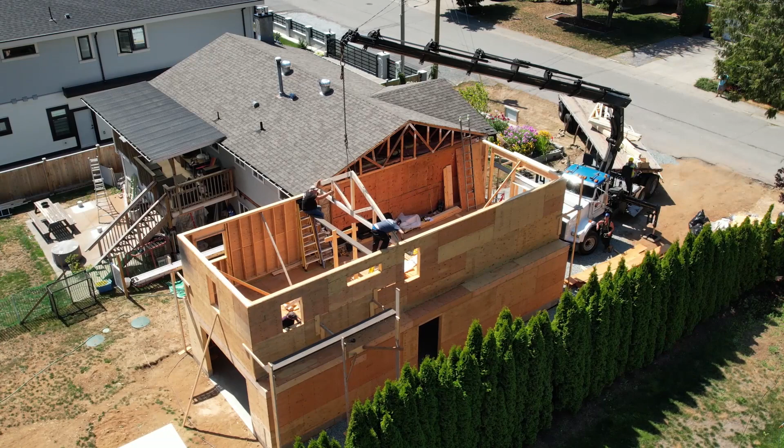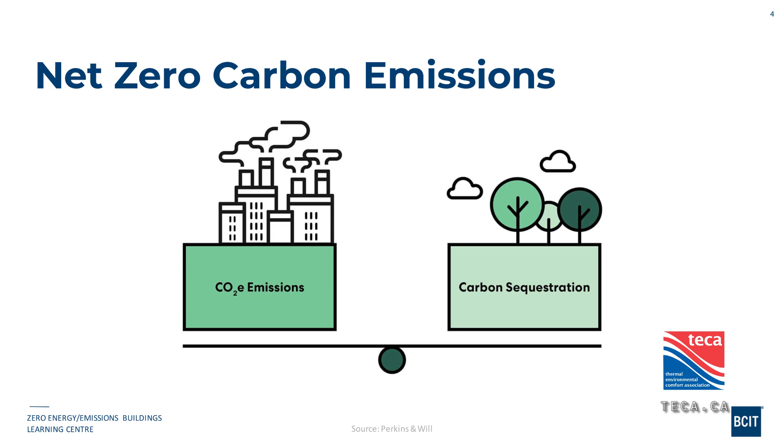Net zero, and what does it mean? You hear this term all the time, you hear politicians talking about it. We're really talking about emissions, and we're talking about balancing the net emissions that we put out into the atmosphere from manufacturing, energy production, land use patterns, all that kind of stuff, with how much carbon we're sequestering at the same time, right? We're trying to get climate change under control, so with net zero we're talking about carbon emissions.

All of this is driven by the Intergovernmental Panel on Climate Change. They've known for like 25 years that to get climate change under control, we have to keep global temperatures within that 1.5 degree overall increase. This is the number, and this is the science that's driving all of our regulations and policies. We need to get about 50% of the way to net zero emissions by 2030 and net zero by 2050. This is what our federal government regulations and policies are striving towards, and this is what BC is chasing as well.

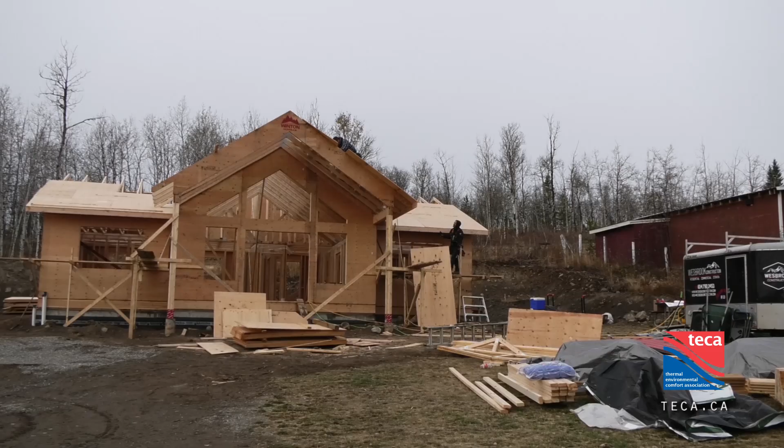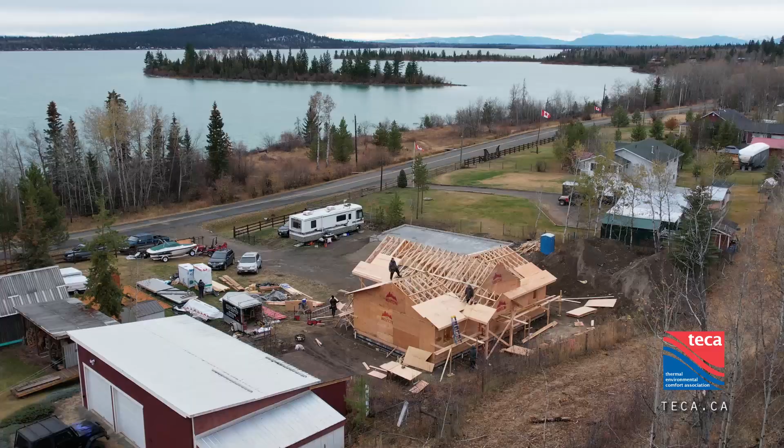Operational carbon is emissions related to energy, so that's your energy use and the emissions associated with that. And then to get to net zero, we're trying to avoid emissions too, so we'll start to see more about renewable energy generation and maybe buying carbon offsets or things off-site. So that's kind of our package for buildings to get to net zero.

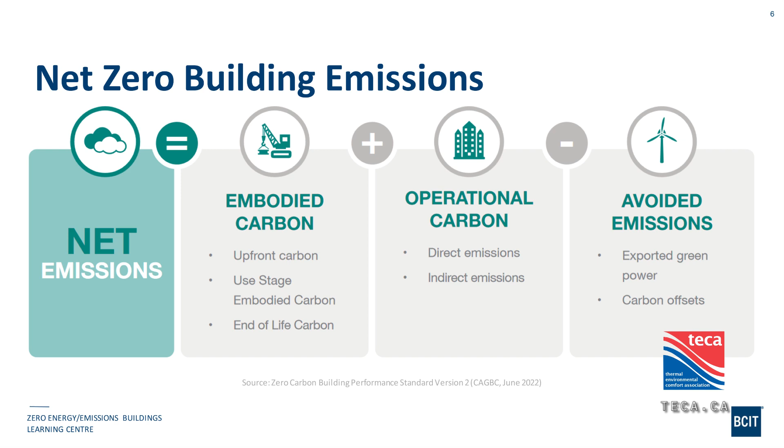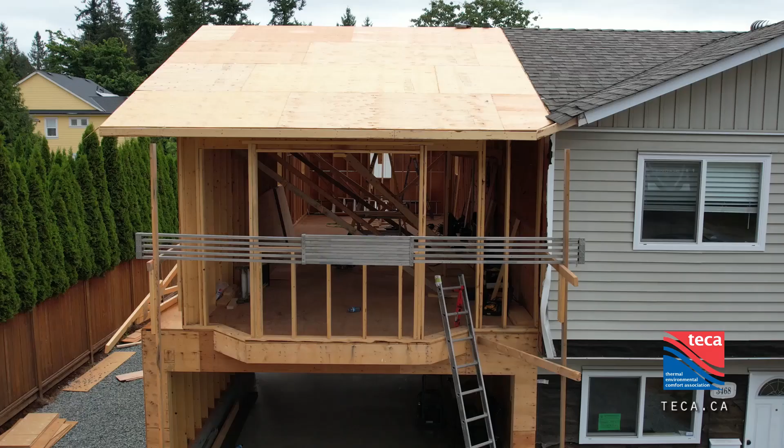So here's a quick poll for you guys. What do you think contributes more emissions in BC every year? Is it the emissions from all the new buildings we're building every year, new construction as well as retrofits of existing buildings? Or is it emissions from energy use of our entire building portfolio? They're almost identical. Embodied carbon from new construction and building renovations every year in British Columbia is 7.2 megatons. Operational carbon from energy in the province is 8.3 megatons. The step code and the zero carbon step code are really only focusing here right now.

Key things to remember: embodied carbon is the emissions from the materials in the building, and operational carbon is emissions from energy use. Achieving zero carbon requires us to tackle both of those, and whatever we can't reduce, we need to buy offsets, right? So let's quickly look at the regulatory context and what's happening.

The feds have standards. The federal government has a 2030 emission reduction plan for Canada, where it assigns responsibilities across the provinces, and it also assigns responsibility to buildings that you guys are responsible for. Clean BC has a roadmap to 2030. Both of these plans have acts underpinning them, so they are regulation. We have to hit these targets and report and measure on this every year. That's why the regulators and the utilities are pushing back on you guys to deliver savings.

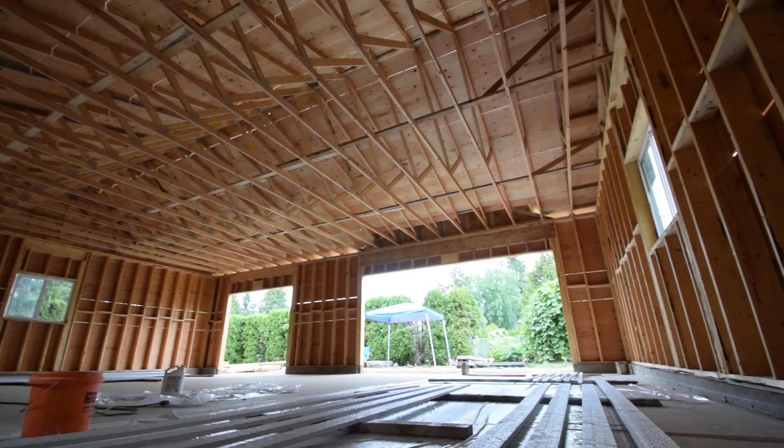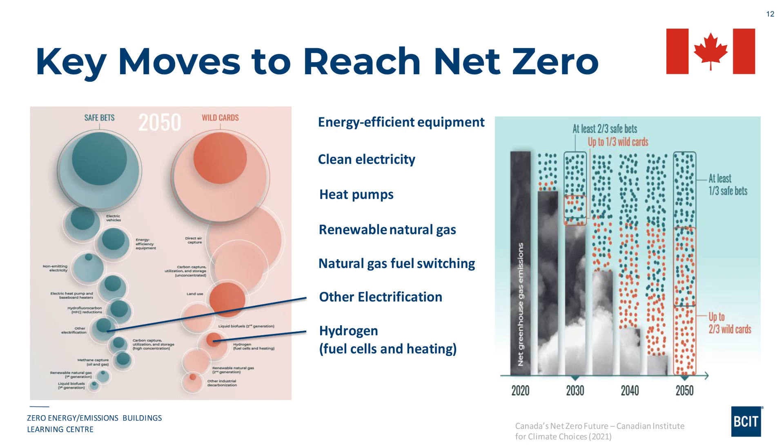Carbon capture and storage. These are technologies that we're developing, and they're not there yet. And so if you think about the pathway to 2050, they're going to do all the stuff that we know right away, and that's where buildings fall in. And that's why the pathway to decarbonize buildings is faster than 2050, and that's why it's more aggressive.

Clean BC has a section for better buildings. The 2030 Clean BC plan is targeting 59 to 64% emission reductions from buildings and communities. So there's some land use in there in that target. Five big areas where they're focusing on seeing those reductions, and that's what's driving the policies, the incentive programs, the step code, the zero carbon step code that you're already seeing.

So they're tackling energy efficiency, low carbon energy sources. Down here at the bottom, they say low embodied carbon materials, but we don't have any regulations around this yet. Does everybody know what the step code is?

Yes, you're a winner. Step code for Part 9 buildings, which is what I was going to focus on today, is in 9.36 of the building code. May 2023, this became mandatory for all municipalities everywhere in the province. Step 3 was required. And Step 3 is about a 20% efficiency improvement over the previous code.

In May, we also adopted the zero carbon step code. And I'm going to talk to you about this because zero carbon sounds a lot like no natural gas, and that's not actually what it means. But we'll talk about this a little bit later. But the zero carbon step code is an optional pathway. Municipalities choose what they want you to achieve, right, based on their greenhouse gas reduction targets.

2032 is the end of, remember how I said, on our pathway to 2050, the sure bets, buildings have a lot of sure bets in terms of decarbonizing. So we're trying to decarbonize buildings faster. So 2032, we're at the top step of the step code for Part 9, roughly 80% more efficient buildings.

By 2030, Clean BC says we're going to have more efficient equipment. Every new piece of space or water heating equipment will be at least 100% efficient. So that's a big change for us. And we're waiting to see that roll out, but that's going to mean we're going to have problems with fossil fuel combustion equipment.

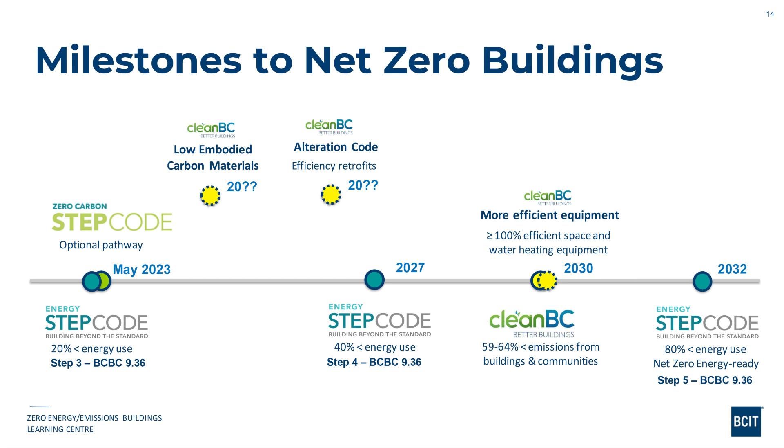So before I wrap up the conversation about regulations, I think it's really important to be clear about what the BC Building Code means when it says net zero energy ready. So a net zero building is a building that produces as much clean energy on site as it consumes in a year. It doesn't mean you're disconnected from the grid, but it means that you have solar panels on the roof and your EnerGuide label says you're down here at zero.

You're certainly consuming energy. If you're familiar with these labels, it tells you this much for heating, this much for ventilation, this much for lighting. But you're producing it net over the year with that solar array to bring it down to zero. CHBA manages a net zero labeling program, so you may be used to seeing their net zero home label.

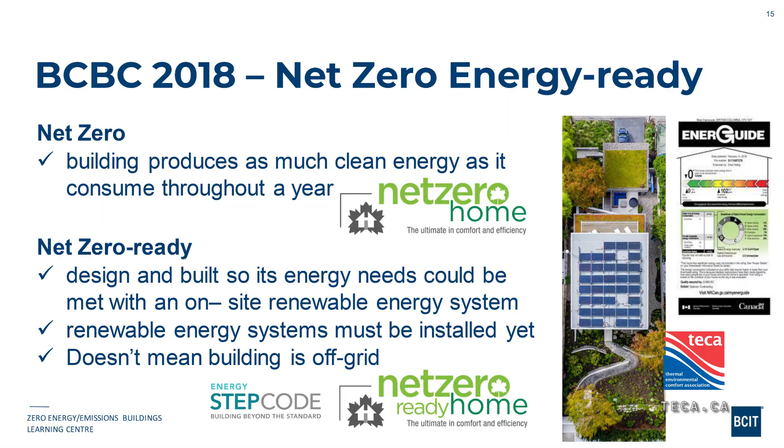The BC Energy Step Code, with their 80% more efficient buildings at the top step, is striving to build a net zero energy ready building. So the buildings we're building by 2032 or probably sooner are going to be so efficient that they can generate enough power on site to meet their energy needs net over the year.

So quick recap, Clean BC, they're asking us by 2030, 59 to 64% efficiency or emission reductions from operational and embodied carbon. But if we're not measuring embodied carbon, they're expecting you to deliver that from operational emissions.

Operational carbon is the only thing in the BC building code, right? There's nothing about embodied carbon in the building code. And operational carbon is called the zero carbon step code. It's 9.37. And embodied carbon is not regulated yet. Okay, so what does this mean for envelopes?

So how are we getting to that net zero energy ready envelope? On average, for a home, a residential building, 60% of the energy use of that building goes for heating and cooling. That includes domestic hot water use. And so in BC, a lot of our emissions are linked to that heating energy because we do a lot of heating with natural gas.

What we're moving away from in the BC Energy Step Code is buildings or homes that look like this: they've got a thin line, not very well insulated envelope. There's holes around for air leakage. And we've got a large mechanical system.

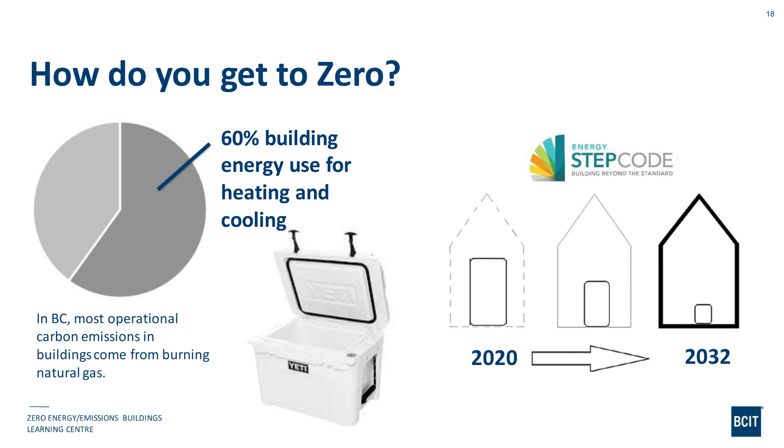As we move across on our pathway to 2032, we're tightening up that envelope, which shrinks the mechanicals, and then we're adding a lot of insulation and efficient enclosure details to really further shrink that mechanical system. So much smaller systems, and those buildings have different problems or different opportunities as well.

So the design teams working on these projects are working with 6 principles in mind. 4 of those principles have to do with the building enclosure, and the last 2 over here about ventilation and mechanicals are around the scope of work you do. So hopefully the design teams are working with you to come up with the best combination of options to hit the requirements of the Step Code.

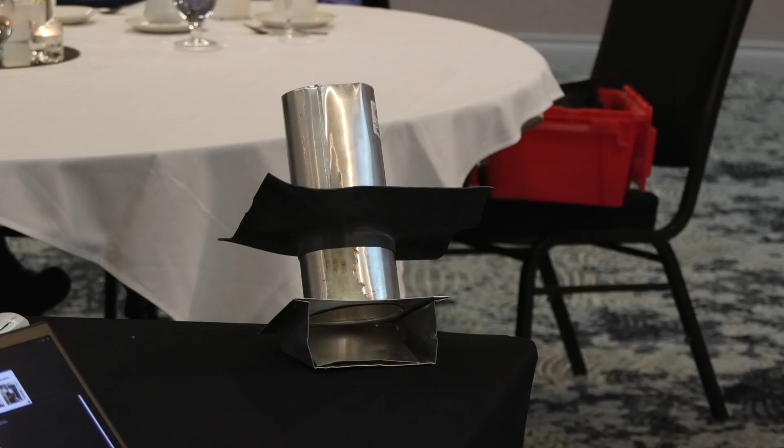So the Step Code is now a performance-based code, and every building is energy modeled. For Part 9 buildings, that's generally HOT2000 software. You have an energy advisor typically who builds that model. They program in how much windows you have, similar to your load calcs for TECA, but then we simulate that over the normalized weather file and figure out exactly how much energy that building should use.

This is the same thing that we've done for years to generate those EnerGuide labels, but we're doing them to prove Step Code compliance, and we're doing those for a building permit stage. So at the time when we get a building permit, we know all the details of the building. We know the mechanicals that are going in, we know the window spec, everything is pre-approved, and any changes to that have to get modeled and updated and get an updated confirmation that your building will comply.

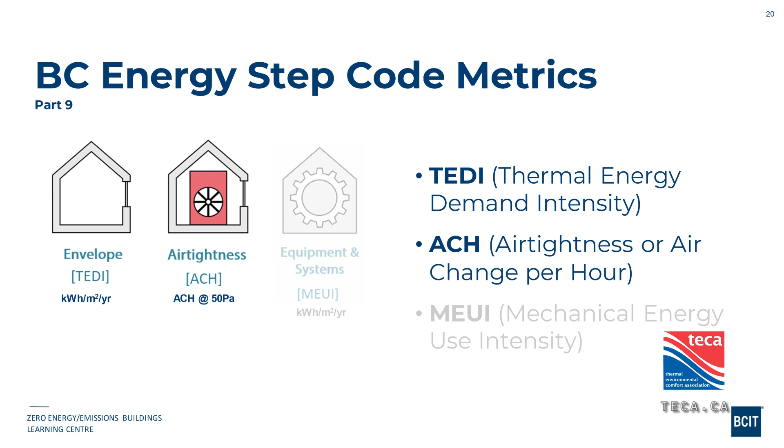So under the Step Code for Part 9, there are 3 metrics you have to comply with. It used to just be, you put in efficient equipment that was this efficient and you built an air barrier and you were good to go. With a performance-based code, that computer model is going to spit out information based on what you input in the design on the envelope, air tightness, and mechanical systems. So there's 2 metrics, TEDI and ACH, and those are the ones that are linked to the building envelope. And the last one we'll talk about a little bit later is linked to the mechanical systems that need to support that building envelope and the occupants.

When the Step Code talks about TEDI, it's in kilowatt hours per meter square per year. So there is a limit of energy that building envelope can use in a year. It's not a BTUH number, it's a BTU consumed net over the year type number. So nobody cares how big your equipment is under the Step Code. They just care how much it uses over the year to heat that building or to deliver the energy needed to that building. So that's what TEDI is.

Air changes per hour is a measurement of air tightness, and air changes is really interesting because it's the first time we actually go out and evaluate performance of your system. In a past life, I went out and evaluated the performance of mechanical electrical systems in green buildings, and they never performed the way we expected. And so we're not trying to go and measure how much energy your building is using, but with air tightness, we measure that. And so that's the piece that if anything falls down or falls apart during construction, you don't hit that air tightness performance measure.

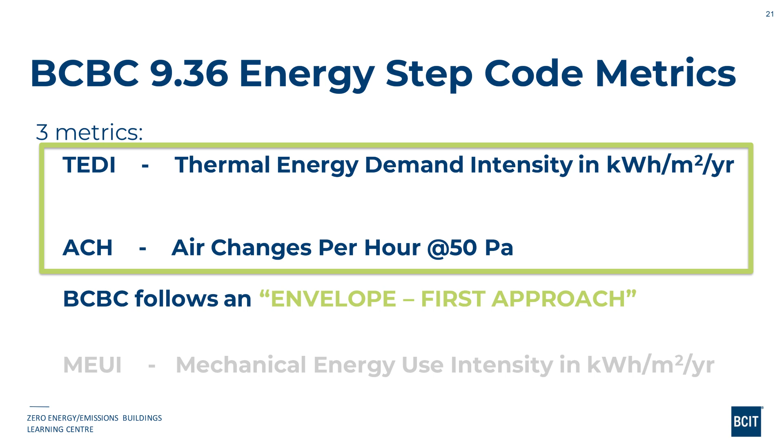So a reminder, 2 of the 3 metrics focus on the building envelope, and they lead us to do that envelope first approach. If you remember that icon where we are plugging up the holes in the building, making the walls thicker before we deal with mechanical electricals, that's called an envelope first approach. That's required with Step Code.

So what does that net zero energy ready envelope look like? So it's a high performance envelope. We know we need to reduce energy by 80% in these buildings, so we've got to tackle the envelope first. 4 big areas. Remember, we talked about 4 of the 6 principles were linked to the envelope. The first one is the improved air barrier. So you can see this red line around the house. That's that continuous air barrier detail. We'll see more insulation. We'll see reduced thermal bridging.

I'll talk a little bit about that. Better windows and doors, right? So not anything that's surprising. But air tightness is an important one to spend a bit of time talking about.

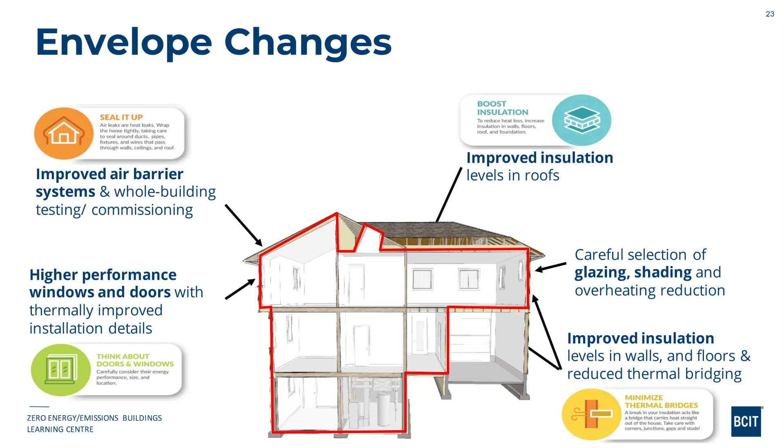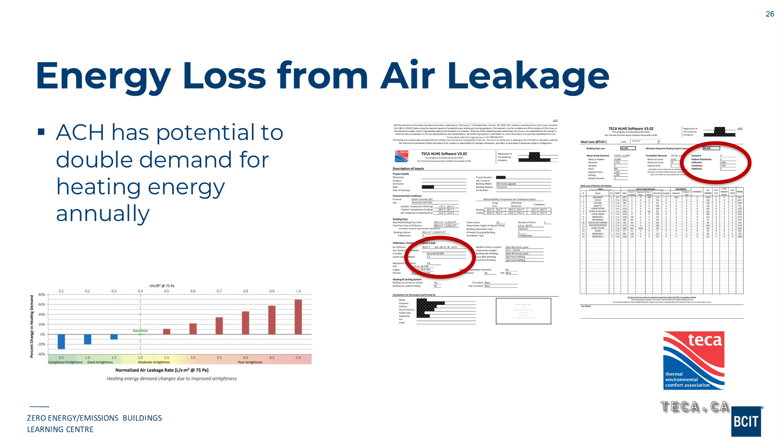So it's for sure in there, and you can play around next time you're doing a heat loss, heat gain calc, change some of those air tightness numbers and see what kind of an impact it makes on your load, because it's significant. So ACH, or air changes per hour, has the potential to double the energy used annually. It's not going to double your load calc on your TECA heat loss, heat gain, because that's your peak, that's the sizing of your equipment, but net over the year, that energy is being lost all the time, right? And so that can have a huge impact on how much energy your building consumes.

There's a lot of risks associated with air leakage in a building enclosure. This is a 4x8 sheet of drywall, no vapor barrier on it. But it's exposed to the indoor environment in your house, right? So 50% relative humidity, or that one's 40% relative humidity, 20 degrees Celsius indoor air conditions. And so over a heating season, about 1/3 of a liter of water can diffuse from the air around us, because we're breathing and cooking and showering and that kind of stuff. And it can diffuse into the wall cavity, right?

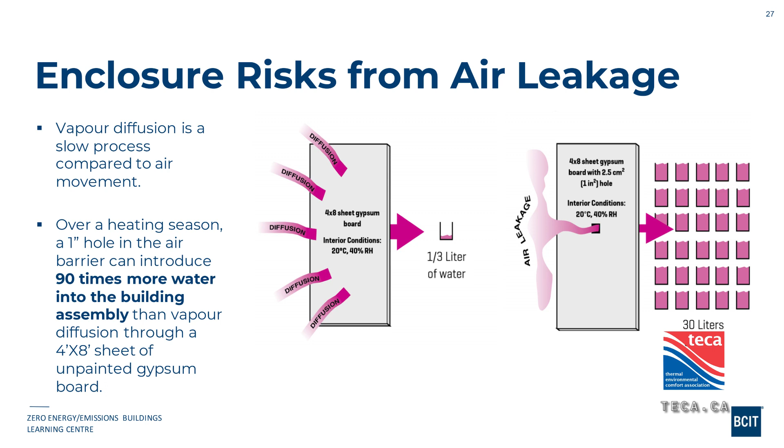It's going to move because vapor travels from areas of high concentration and warm areas to areas of low concentration and colder air. So vapor drive in a heating dominated climate is from the inside to the outside. So vapor in our house is always trying to drive out into the wall towards the outdoors. So over a heating season, 1/3 of a liter of water can move through that wall if I don't have vapor control. Air leakage in a 1-inch hole can introduce 90 times as much water. 30 liters of water can come into my wall assembly from the air around us over a heating season. So this is a huge, huge difference.

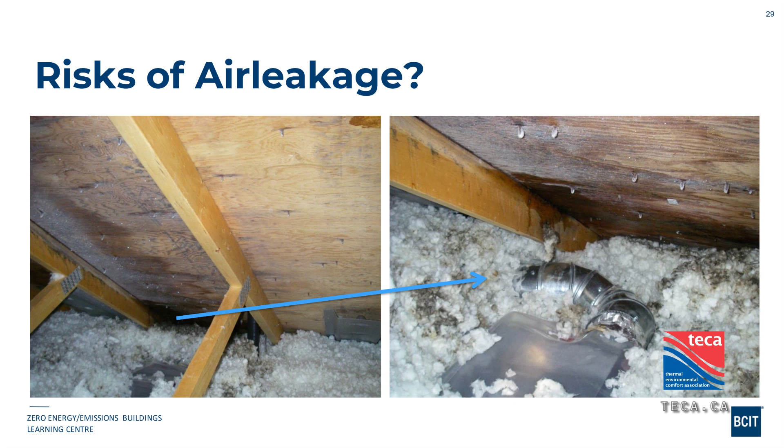So the focus on air tightness and on measuring air tightness and making sure we don't make mistakes is because there's a huge building science risk associated with air leakage. Air barrier. The poly, if you haven't done a drywall repair lately, is generally right behind the drywall. And the poly, typically in buildings, is the vapor barrier that has to be on that warm side of the building to keep all that moisture from driving into the wall. And it's often used as an air barrier.

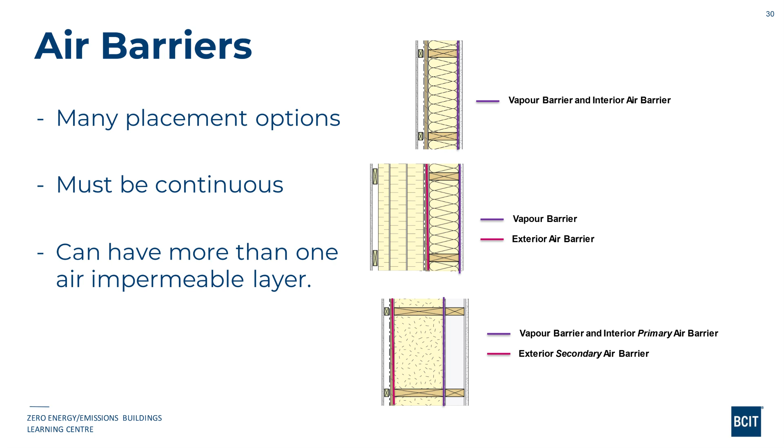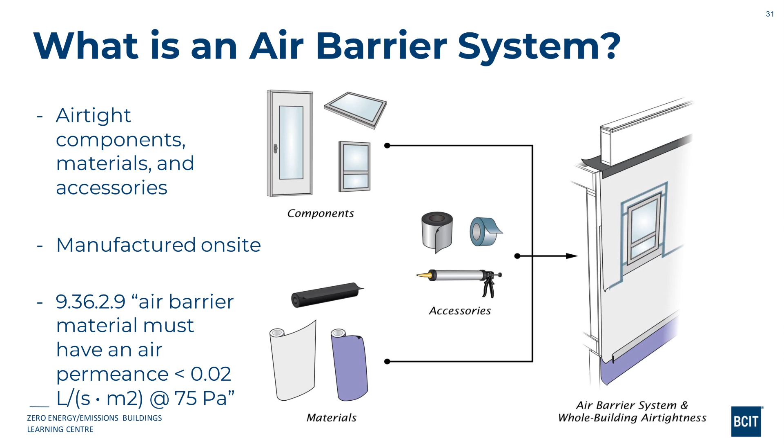But you could start seeing wall assemblies where your poly is only acting as a vapor barrier, and the outside, the building paper, the Tyvek, becomes your air barrier. Tyvek, you can see this is your framing cavity. With the STEP code, we're going to see more insulation. So once you start adding exterior insulation, then you're really protecting that air barrier. So your air barrier can be on the inside, it can be on the outside, it can be sandwiched between some layers of insulation. As long as it's continuous, it's effective. It doesn't matter where it is.

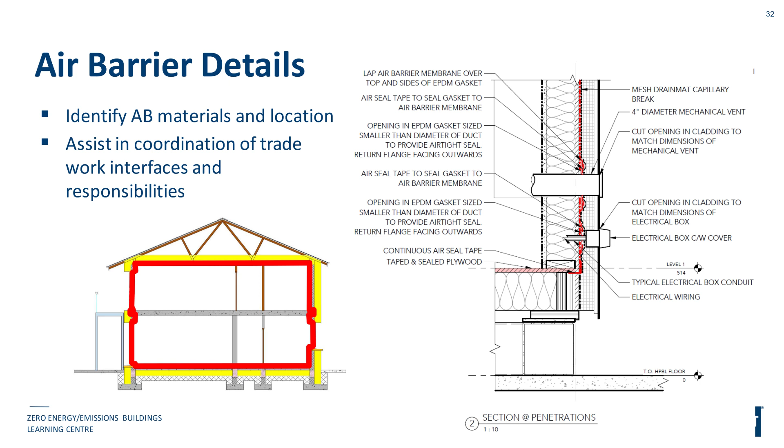In a deep, fat wall like this, we want 2 air barriers. You guys don't need to figure this out, but somebody in your project team should tell you exactly what materials are the air barriers. Is it on the inside? Is it on the outside? What is the strategy to detail that air barrier? So you have to understand what each of these layers are doing. Where's your air barrier? Where's your vapor barrier?

So the air barrier needs to be sealed and made continuous, and the vapor barrier just needs to be everywhere, but it doesn't need to be made airtight unless your vapor barrier is also your air barrier. And in a lot of our old buildings, poly behind the drywall was the air barrier and the vapor barrier.

And more people are shifting to an exterior air barrier, using your Tyvek as the air barrier, because it's easier to protect over the life of the building, right? When you want to put in a new kitchen, there isn't all this damage to your air barrier. But also, there's fewer interfaces to manage.

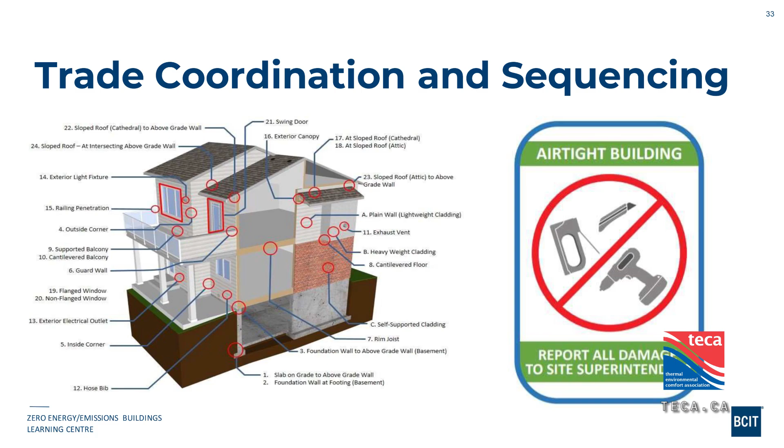Fewer trades are working in that zone. As we make the walls thicker, we're adding in higher performance windows. We're also getting a little bit more scared about building science in these homes.

And I say scared, I get scared because what happens is, as we add more insulation, the drying potential of those assemblies... like I was pushing a lot of heat through the walls, right? All those BTUs in that furnace were pushing heat through the walls to dry it. So if I was having some condensation from air leakage in my wall, it was probably okay in my 1950 home with 2x4 walls, because I was pushing a lot of heat through to help keep it dry.

But as I make those walls really thick, there's almost no heat getting through those walls anymore. So the drying potential has decreased. So we're seeing a shift to things that are less risky from a building science perspective, right? We're trying to mitigate condensation on windows.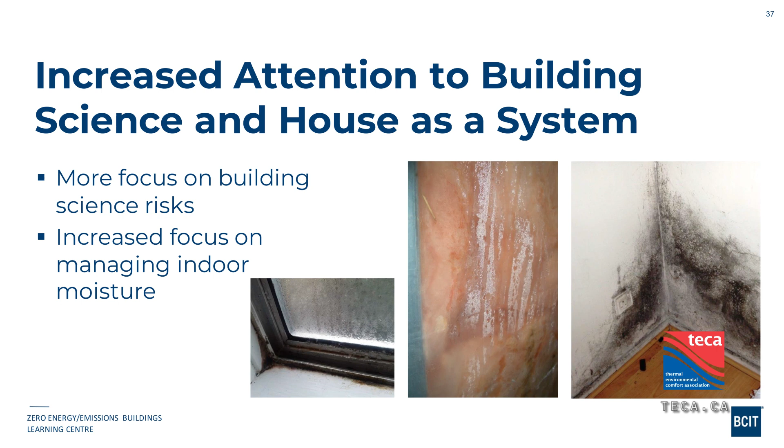So there's a lot of concerns, and that's why I'm already hearing building officials saying this is too risky. We want to see a building enclosure specialist and engineer sign off on this detail. They're worried about moisture and that kind of thing. So it's a good time to go back and look at vapor barriers when we're talking about moisture.

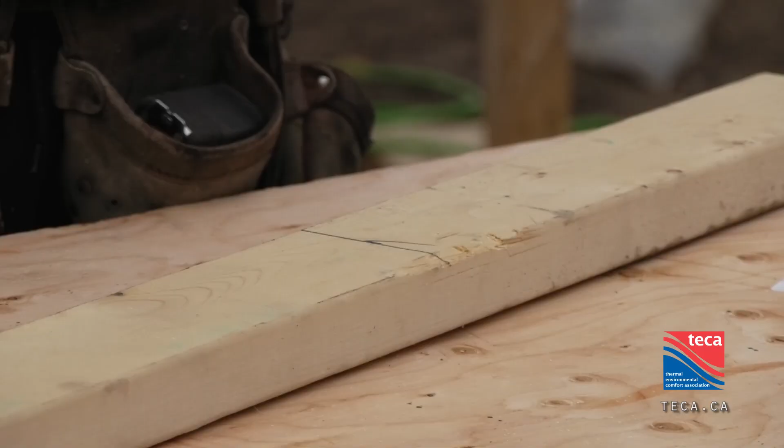You can have vapor barriers and vapor retarders. By code, you have to have something on the warm side of your assembly that is going to prevent moisture from migrating into the wall assembly. In the building code, they generally call that a vapor barrier. And the vapor barrier that we're super familiar with is poly. So they have to be on the warm side of the assembly in a building that's heated. They have to be continuous, but not necessarily airtight.

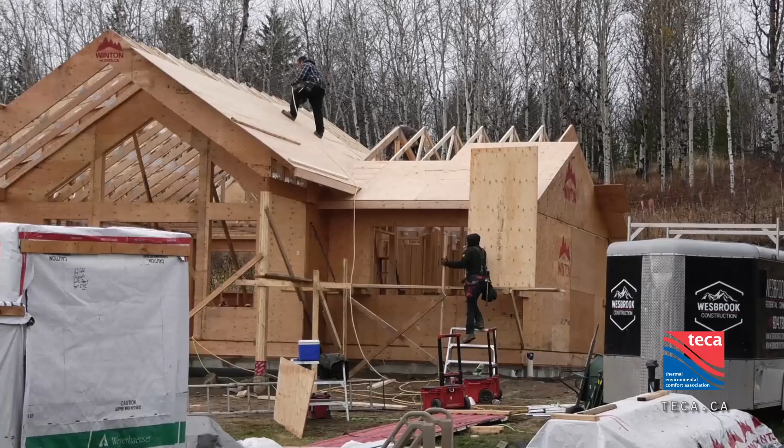So that's why it's good to know which one is your air barrier. Because they're not so worried about you putting penetrations through a poly and making sure they're really airtight if poly is not the air barrier, right? And it's the Tyvek, like you mentioned. So knowing where to make those airtight connections is important.

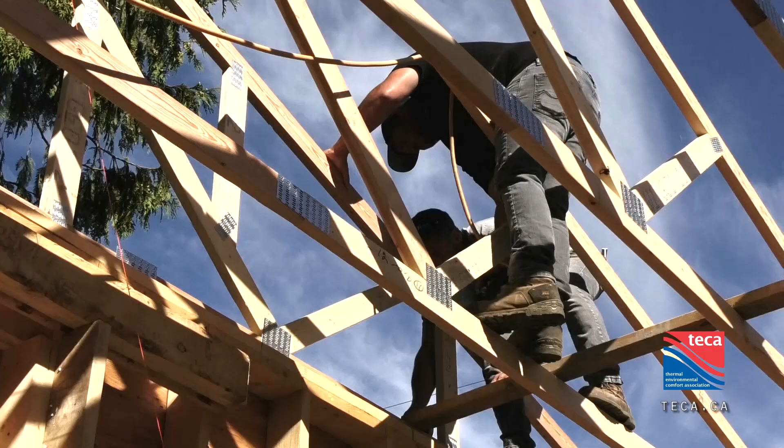A new emerging thing that we're seeing, I guess it's not really new, is smart vapor retarders. So if you think about your Gore-Tex coat or something like that that's going to allow you to dry, smart vapor retarders are kind of like that. If there's moisture in the wall and high humidity levels in your wall assembly, it'll let that moisture dry to the inside. But all that warm, moist air in your house, it's going to prevent it from migrating into your wall assembly.

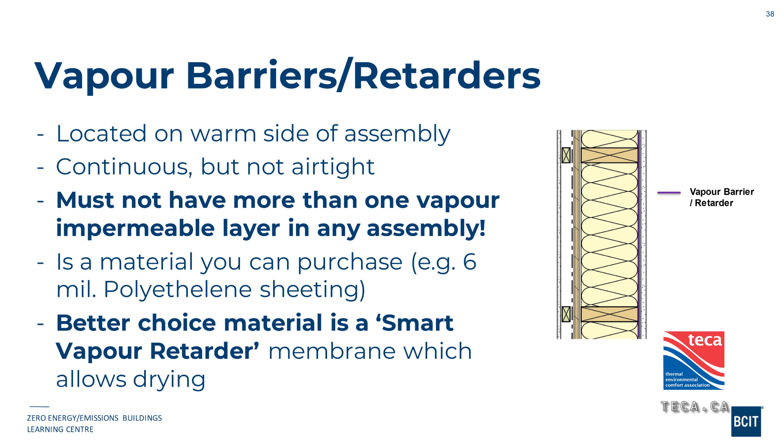So I'm hearing building officials saying, below grade, basement walls, nothing but smart vapor retarders. We're not letting them put poly below grade because we know we're going to see condensation down there, especially if the footings aren't wrapped, right? The concrete is constantly pulling moisture up and bringing that inside. So we're seeing changes around vapor control materials. Those highly insulated assemblies, which I mentioned, are changing what we do.

So imagine this is your inside air at 20 degrees Celsius, 50% relative humidity. The dew point of that air is 9 degrees. So if it's minus 20 outside and you just had your regular 2x6 wall with batt insulation, probably the plywood sheathing would be below the dew point, right? It would be at minus 20. So somewhere in here, any air leakage can condense, right? Any moisture that's in there can condense and cause rotting.

As you add insulation to your wall, especially if it's like in this picture where it's rigid continuous insulation on the outside, you're warming up the temperature of that sheathing. Probably it's not below 9 degrees anymore, right? So we're now building a more durable and resilient building enclosure. It can't dry as well because there's not as much heat moving through that wall, but we're keeping anything organic above the dew point.

So we're going to see some focus on this kind of stuff, right? Doing things that are less risky. So some of the solutions you're going to see in walls is these fat walls, especially split insulated walls. So you've got something maybe in the cavity, but you've got continuous insulation on the outside, reduced air leakage, vapor

permeable insulation. So like rock wool insulation on the outside of your building enclosure. Rock wool is more permeable than Tyvek. So Tyvek is like a Gore-Tex coat, lets things dry, and rock wool is even more like that. Mineral wool insulation, the rigid stuff, is more permeable than the Tyvek, right? So a really durable building enclosure if you do that. So as the walls get thicker, we're going to see some new changes and new focus here.

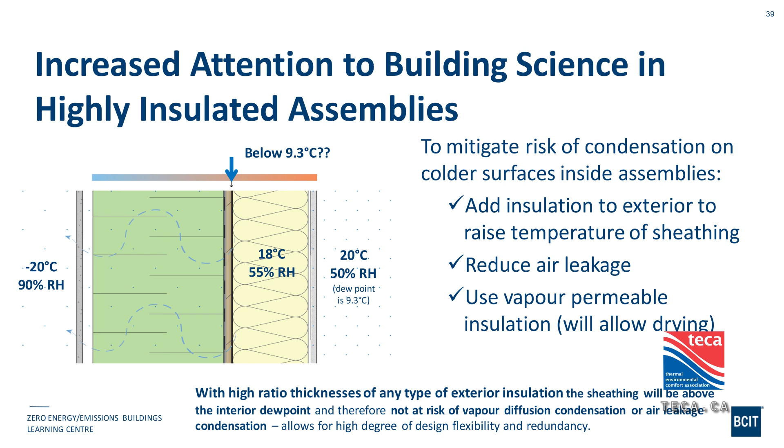Another thing we're seeing is changes to the building science in attics, right? So traditionally, we had vented attics and they were poorly insulated, probably not very airtight. So there was a fair amount of air leakage and heat driving up into the attic. And in a coastal climate where we have a lot of moisture in our attics, all that heat loss was kind of keeping the attic dry. And as you start to add insulation in the attic and reduce air leakage too, those roof surfaces are getting colder, and so there's more potential for condensation up in the attic. There are some risks there.

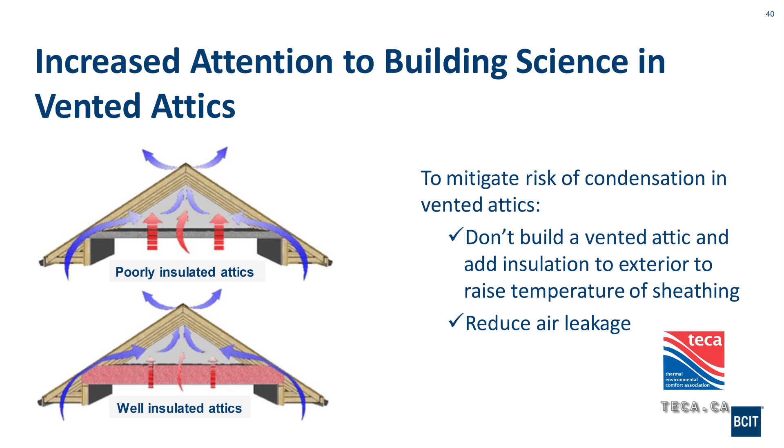So what we're seeing people do is stop building these vented attics and start making the attic part of the conditioned space, which for you guys as mechanical contractors means all of a sudden there could be some extra space for mechanical equipment that's inside the building envelope. So if you're involved in early design and we're making these decisions, you could say, well, you know what, I could put some mechanical space up there, and give you back some square footage somewhere else. But the attic is part of the building enclosure, right? So it's now a full height room.

I'm not going to spend a lot of time talking about windows, but one thing to watch for that we keep hearing is happening is you get architectural plans that you may be using for your heat loss, heat gain calcs, and they will tell you something about the windows, but that's not actually what went in on the building permit. So you have to look at those step code compliance forms that went in with the building permit, because they will list the very specific performance specs of those windows. And you want to use those in your heat loss, heat gain calc,

because the plans are often for a generic house. And what we're seeing more and more, especially when people want to give themselves lots of choice for mechanicals, is they try to exceed the requirements for the TEDI metrics, so for the envelope. And they do that sometimes by putting in more than one window spec on the house, right? You might have different coatings and glazing on the east side than on the south side, than on the north side. And so we're seeing a lot of variation.

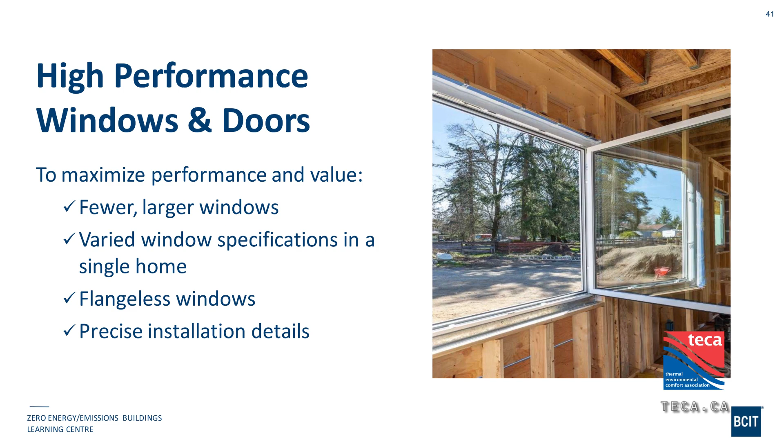And I've had a number of energy advisors ask me to please promise that we tell people that if it's not on the step code compliance report, then it's not what's being spec'd for the house, right? The building official is checking that compliance form, not the architectural drawings. So just double check that the specs in the compliance form are what you've used for your heat loss, heat gain calc. The stakes are pretty high when it comes to airtightness, so making sure that you're not going to get blamed and that they've got a strategy is really important, and that you know what material is the air barrier, right? Is it the Tyvek, and what are you doing and who do you need to tell when you make holes, right?

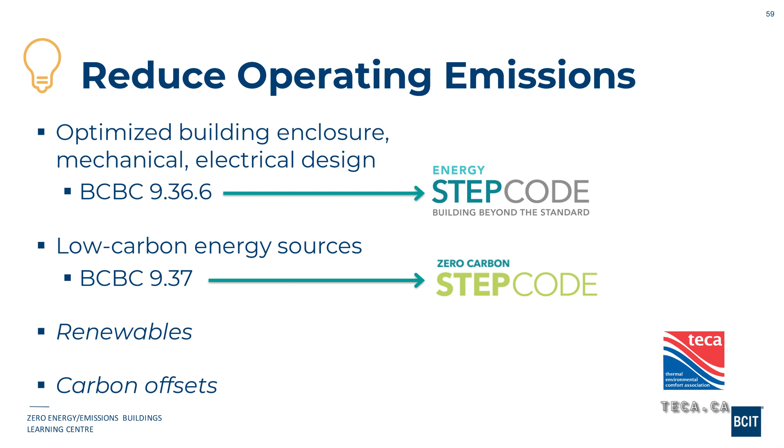Zero carbon step code, optional part of the step code. 9.36.6 is the energy step code, 9.37 is the zero carbon step code. You can look it up. It'll tell you the metrics. What's really confusing about it, if you've seen any of this marketing and branding, they tell you, today we're down here, we have moderate carbon performance, at some point we're going to be at zero carbon performance. And for me, that makes me think right away there's no more gas, right, when it comes to the zero carbon step code. Just to be clear, this is optional. Municipalities will tell you what they want you to hit.

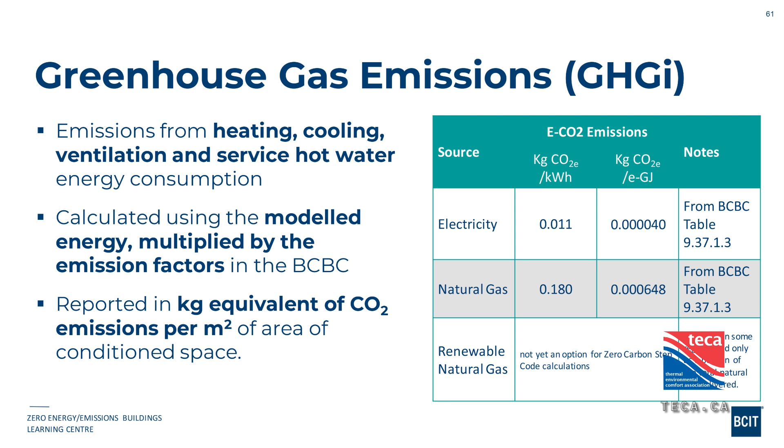And your natural gas boiler is less than 100% efficient, so you can quickly see how you end up with a lot more emissions associated with heating with natural gas. So renewable natural gas is from organic sources, captured from sewage treatment plants and that kind of thing. It is not accepted under the STEP code and the zero carbon STEP code yet. Fortis is lobbying really hard on this, but it's not in there, so it's currently not a calculation option for you.

But there's 3 ways of calculating compliance with this. And one of them is to just take the energy use, that MUI calculation that you did that comes out of the energy model, apply the emission factors, and you get a greenhouse gas emission intensity. So the first way, which is really great for small houses, option 1, is just kilograms of CO2 emissions per year for that house. The next one is option 2, you have to comply with both of these, which is a maximum limit for the house as well as a greenhouse gas intensity per square meter.

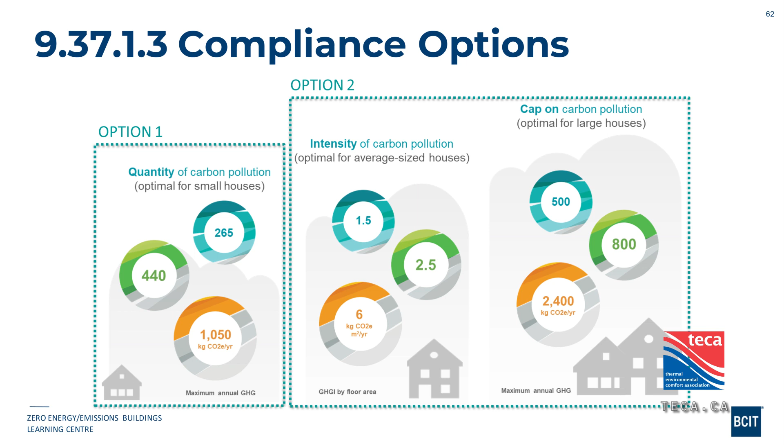And the third option is this prescriptive pathway, and this is the one that kind of worries people. So if you don't want to calculate anything because you're not energy modeling, which can still happen, and your municipality says you need to be at zero carbon, it just means there's no fossil fuels on your site. So it's just a checkbox. You don't need to calculate anything, but this is the one that gets you away from fossil fuels quite quickly.

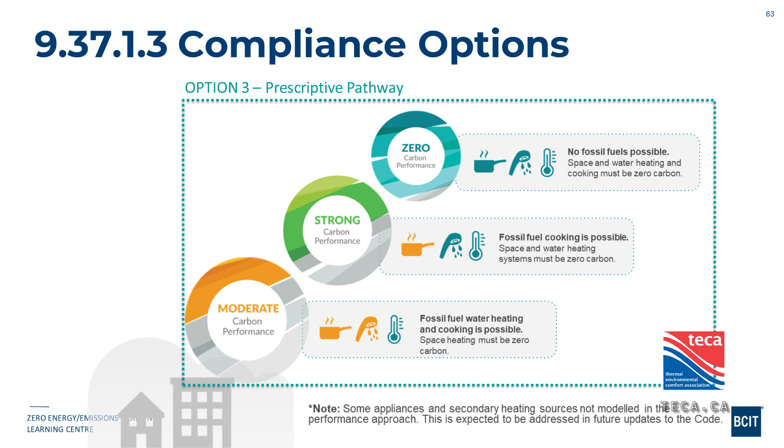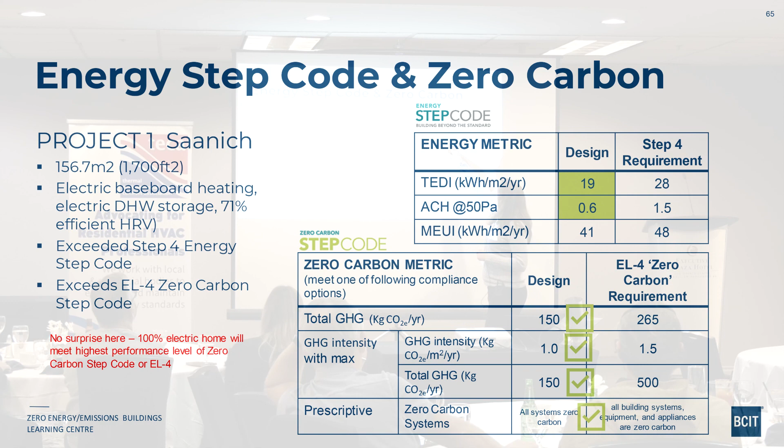2 examples of homes that have done this. This is an all-electric home in Saanich, 100% electric baseboard heating, step 4 of the STEP code. And so here's your STEP code metrics. This is the requirements for TEDI and ACH. So 28 on their TEDI, ACH of 1.5, a MUI of 48 to hit step 4 in Saanich. And this house, the green boxes are because they way exceeded that TEDI. So their envelope was way better. Their air tightness, they were down at 0.6, which is a passive house level.

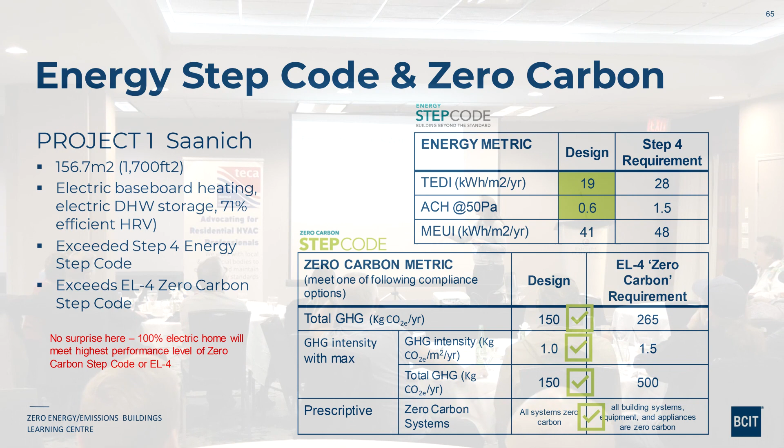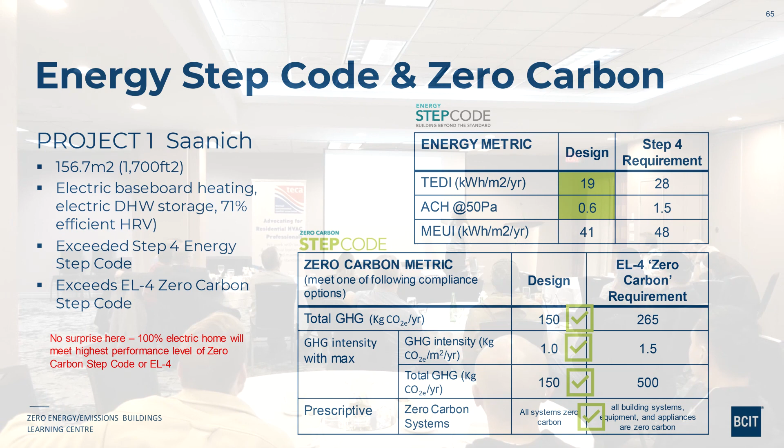So they exceeded it. But when it came to the 3 different ways of calculating compliance with the zero carbon STEP code, they met every option. This is what their design metric was calculated at, and this is what they had to hit. So they're way under their carbon limits at the top step of the STEP code.

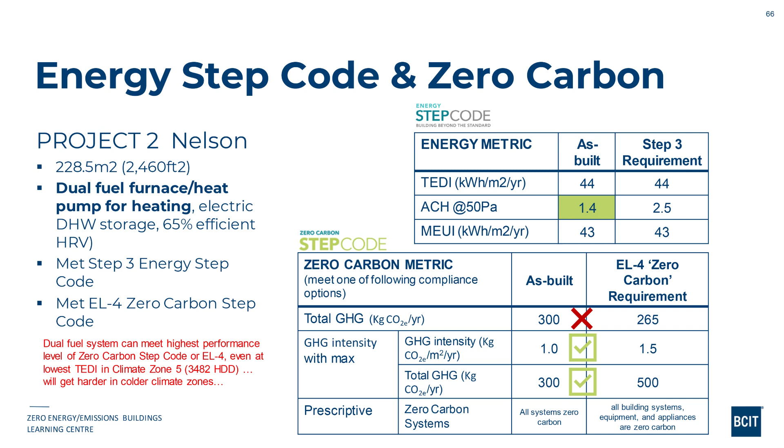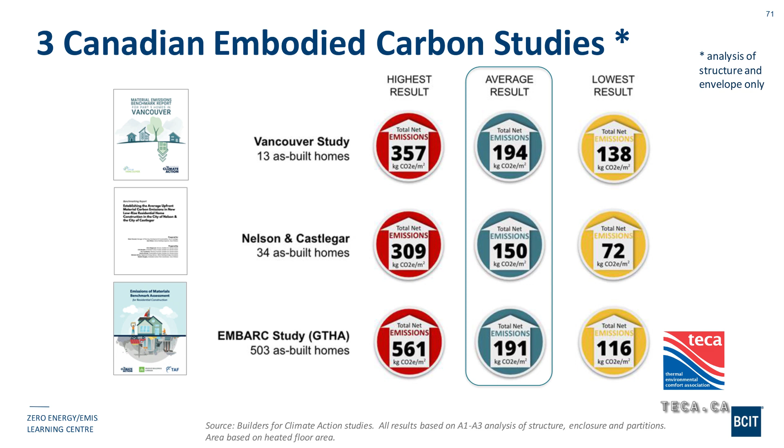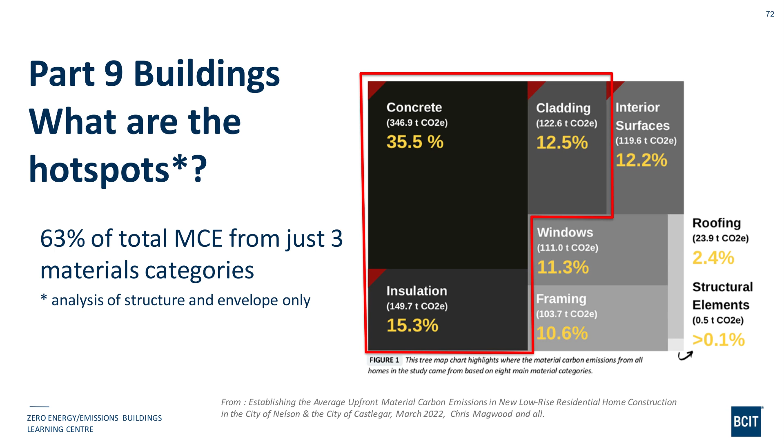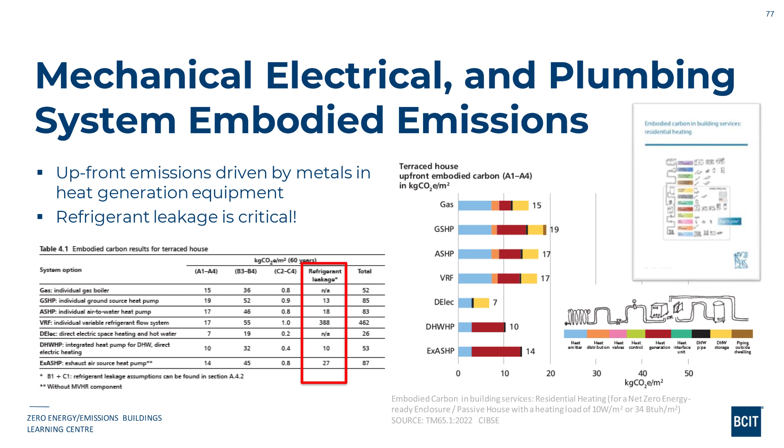So stay tuned, because this stuff is going to come out, and it's going to shape some of the policies, regulations, inspections and certification requirements that are going to come in around heat pumps. So, last slide. When it comes to mechanical systems, part of what is driving up embodied carbon in that first chart is metal. Our heat pump systems have more metal, right? We've got outside units as well. So that's part of what's driving up that initial number.